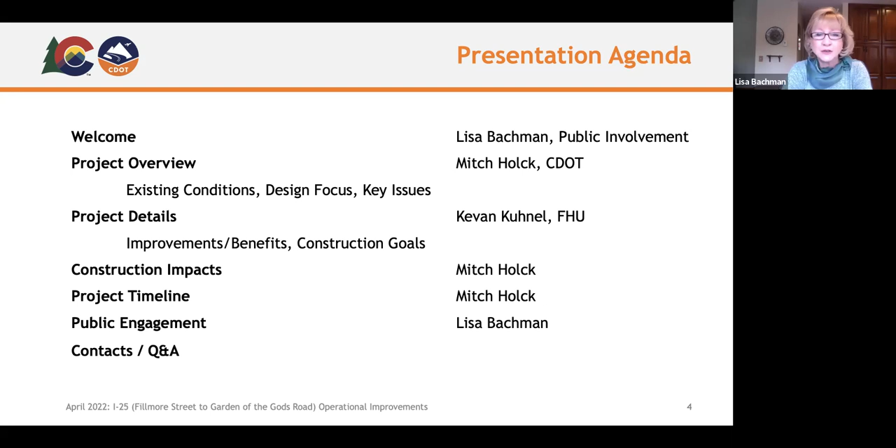And now I'd like to introduce Mitch Holck, who will provide an overview of the project. Thank you, Lisa. This project is on I-25 between the Fillmore Street and Garden of the Gods exits, 145 and 146. I-25 in this corridor is experiencing operational deficiencies, primarily due to increased traffic from community and business growth here in Colorado Springs.

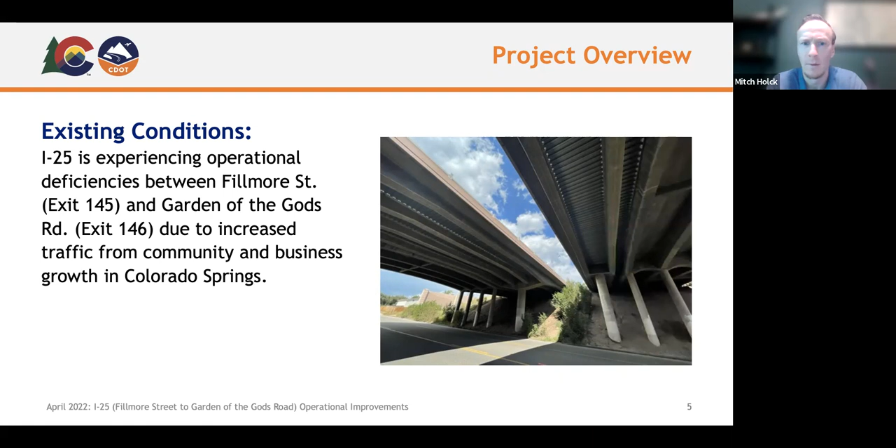The design team for this project has a primary focus in 4 areas: developing continuous auxiliary merge lanes between those exits, 145 and 146, replacing and expanding the existing Ellston Street overpass bridges, strategically preparing the corridor for long-term future expansion, and keeping our objectives aligned with the previously completed South Front Range Corridor Assessment Study.

We're estimating this project to cost about $52 million for design and construction, provided through state allocated infrastructure funds.

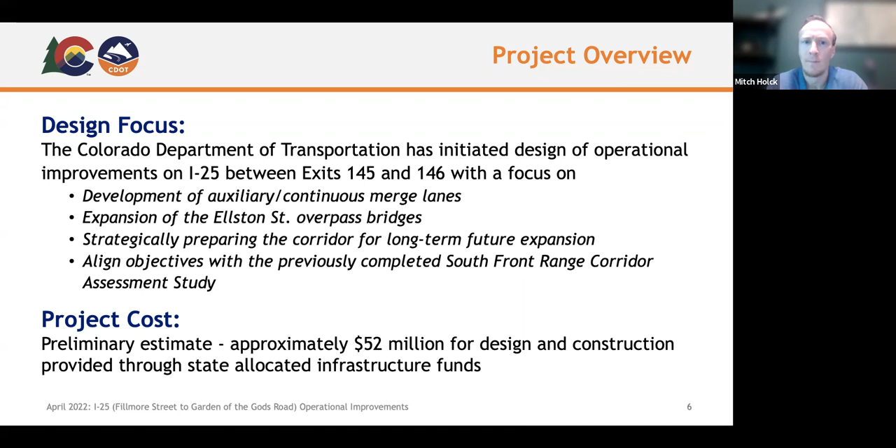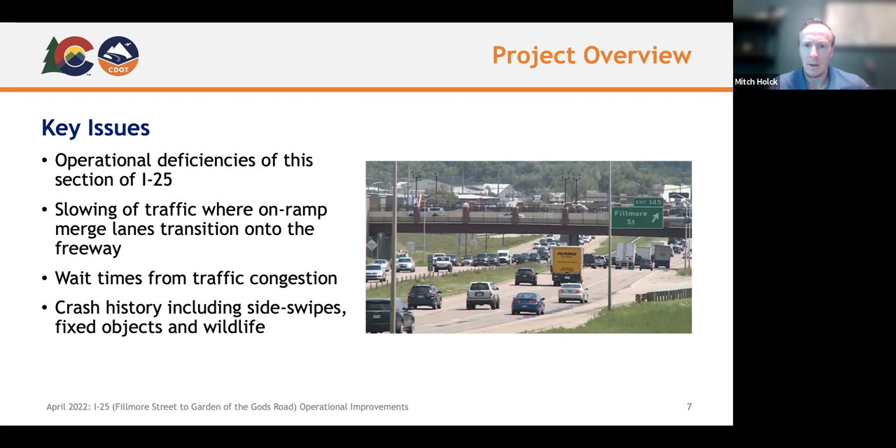Some key issues that we're seeing on the corridor in the project area include operational deficiencies, such as slowing of traffic where on-ramp merge lanes transition onto the freeway, wait times due to traffic congestion, and some crash history, including slight side swipes, fixed objects, and wildlife strikes.

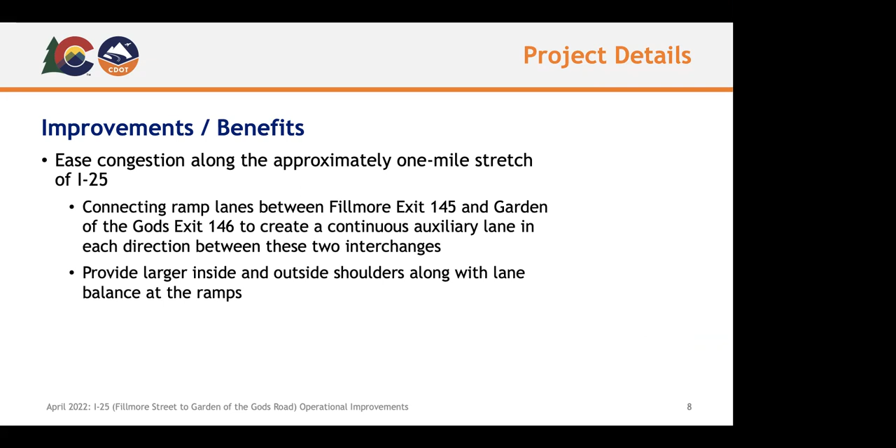Hello, thank you, Mitch. All right, I'm excited to talk about some of the improvements and benefits that we will be providing throughout the corridor. So as Mitch mentioned, easing congestion throughout the corridor is a main focus, and it'll be between Fillmore and Garden of the Gods. And the way we're going to do that is through operational improvements.

So one of the things that we'll be doing is a continuous aux lane between Fillmore and Garden of the Gods, and that'll give motorists a little bit of time to merge, whether onto I-25 or off of I-25, a little more time to make those movements.

Additionally, we will be providing larger inside and outside shoulders. That way, if there's a breakdown or if someone needs to pull over, it gives you a little more room to detour traffic around them.

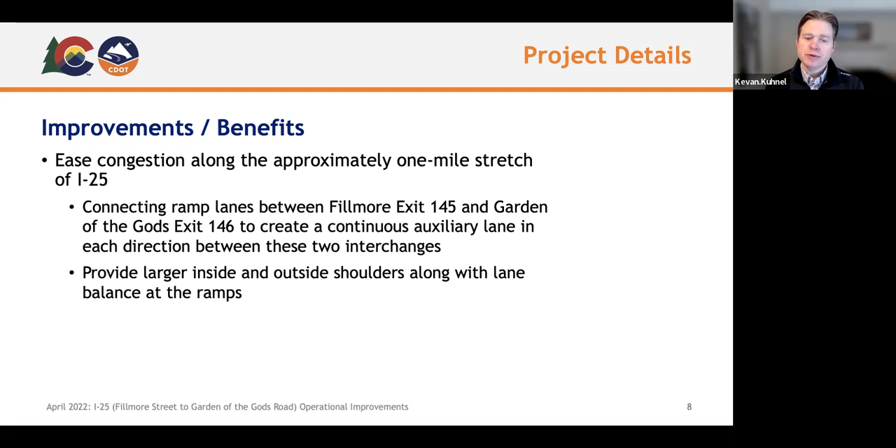And also lane balance. Currently at the off ramps, we've got a single lane off ramp. We'll be providing 2-lane off ramps. And what that does is it decreases traffic friction, makes it a little bit easier for motorists on I-25 to make that movement to exit the interstate.

Also, the Ellston Street Bridge is an old structure and it's a little bit narrow, so it can't accommodate all of the proposed improvements needed for this project. We'll be replacing those structures with wider structures, which will allow us to accommodate the aux lanes across them, as well as some future improvements planned for the project.

For the project area, if you've driven this corridor, you've noticed the pavement is a little bit rough and could use some help. So what we're looking at doing is resurfacing the project from a little bit south of Fillmore to a little bit north of Garden of the Gods. There's an asphalt to concrete joint in those areas, and basically from joint to joint, it's about 2 miles that we'll be fixing the asphalt to have a nice smooth, cleaned up surface when we're done.

Also, we'll be working on the ITS in the area, replacing the conduit as well as the fiber within it, getting that spliced over.

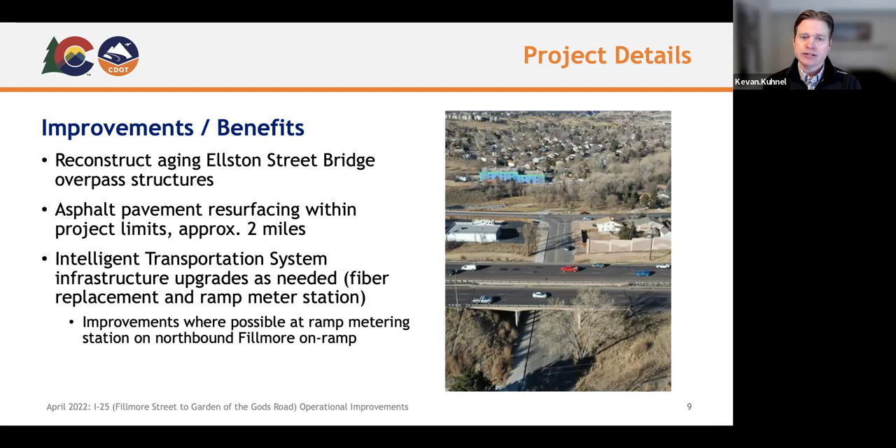Additionally, the northbound on-ramp at Fillmore is currently backing up traffic a little bit into Fillmore. What we'd like to do is add some additional storage to hopefully improve that a little bit.

Additionally, we have water quality enhancements planned for the project, specifically stormwater quality. There's a number of ponds throughout the corridor that are a little bit outdated, so we're going to bring them up to current standards and add new features like outlet structures, forebays, trickle channels, and improved access. They should then function a little bit better, have cleaner stormwater coming off the project, and also help our friends in maintenance have better access to get in and keep them in tip-top shape.

The Sinton Trail runs underneath I-25 along Ellston in the middle of the corridor, and we're going to make sure we preserve that with the project, as well as on the north side of Ellston. Currently there's a gap in the sidewalk, so we're going to connect the sidewalks, fill that gap in, and provide another pedestrian route through the corridor.

We've noticed as we've studied the corridor that there's been some incidents with wildlife. So in the Ellston area, we're going to add some additional fencing to help funnel the wildlife underneath Ellston, and provide a dedicated path on Ellston, just south of the Sinton Trail, to give them a spot to get through, keep them off the interstate, and hopefully minimize any wildlife we see up on I-25.

Also, as we improve those shoulders, we're going to be expanding them towards the center of the roadway where there's an existing cable rail barrier. We're going to take that out and add concrete barrier between the northbound and southbound lanes.

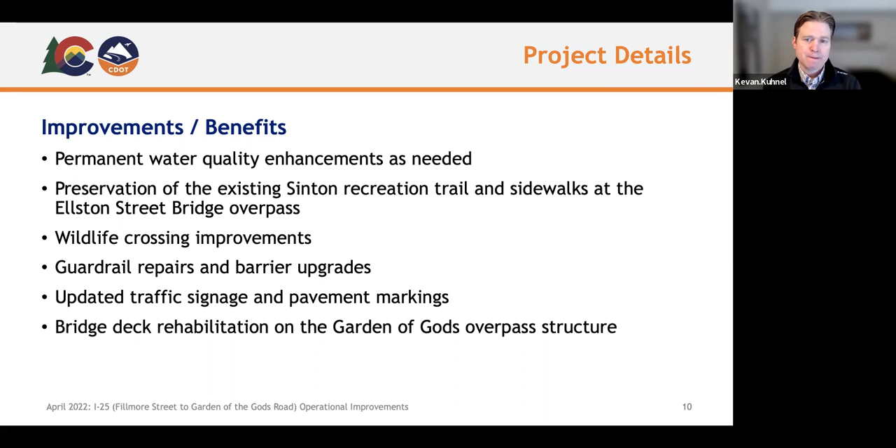Then construction goals for the project. This is kind of our guiding light through design, as it sets us up for what impacts the traveling public is going to see as a result of this project during construction.

And I'm happy to report today that our goal is to keep 3 through lanes in both the northbound and southbound direction during any peak hour traffic. We will need to occasionally do some lane closures, and we'll try to limit those to off-peak time as well as nighttime, to keep traffic flowing and minimize impacts to folks in the area.

Access is always important to our friends, the businesses and neighborhoods. We're going to make sure to maintain those as best as possible, have good detours, and focus on the Sinton Trail and Ellston Street, so that as we move into final design we keep access flowing for all those different elements.

We'll be using phased construction on this, doing a little bit at a time, to keep motorists and the traveling public moving through the project area, in small pieces at a time.

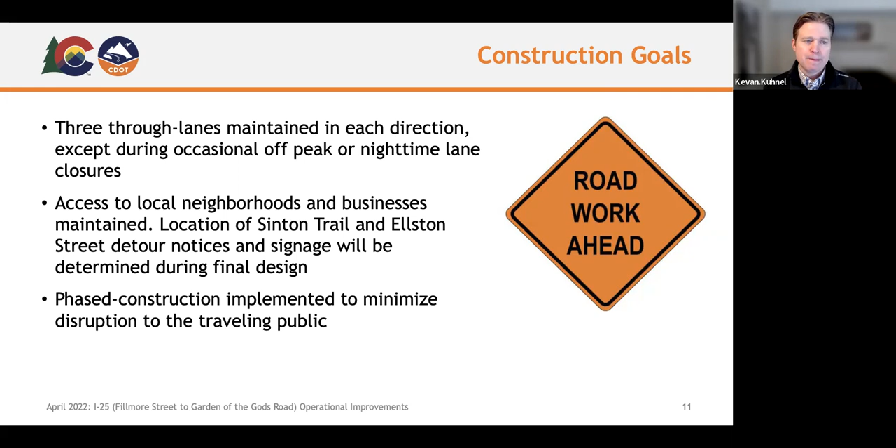Also, access to sidewalks and trails—we'll make sure to maintain those to the maximum extent feasible, along with bike and pedestrian detour routes. We've been working with a group of stakeholders to get input on how best to facilitate bikes and peds in the area, specifically at the Sinton Trail, dialing in those detour routes with robust outreach during construction so folks have advance notice if they need to take an alternative route or mode of transportation. The guiding principle is minimizing delays and keeping access moving through the corridor, especially for emergency service providers.

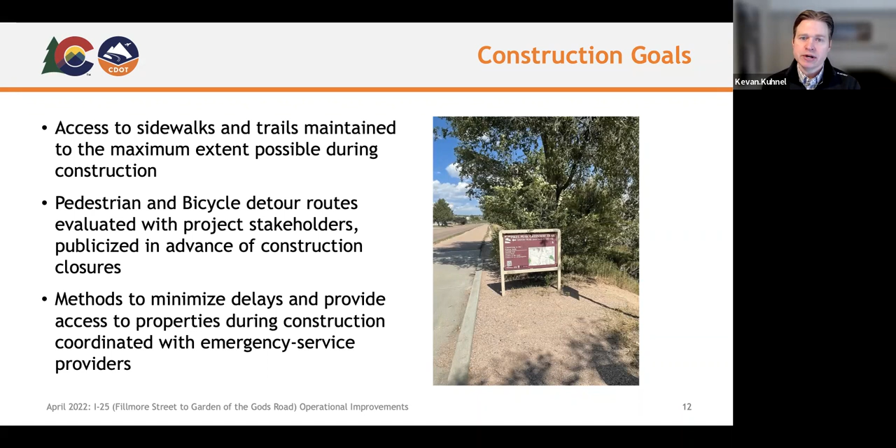With that, I'll hand it over to Mitch.

Thank you, Kevan. Moving into construction impacts for this project, we do anticipate some lane shifts and closures on I-25 during construction. Lane closures will predominantly occur during nighttime construction hours outside of peak traffic. Daytime lane shifts will be in place to route traffic around construction zones, keeping our workers safe and traffic moving. We expect ongoing reconfigurations of those lane shifts during construction.

We also expect some temporary impacts such as noise, air quality, traffic congestion, and access detours. These are typical for interstate construction projects, nothing out of the usual.

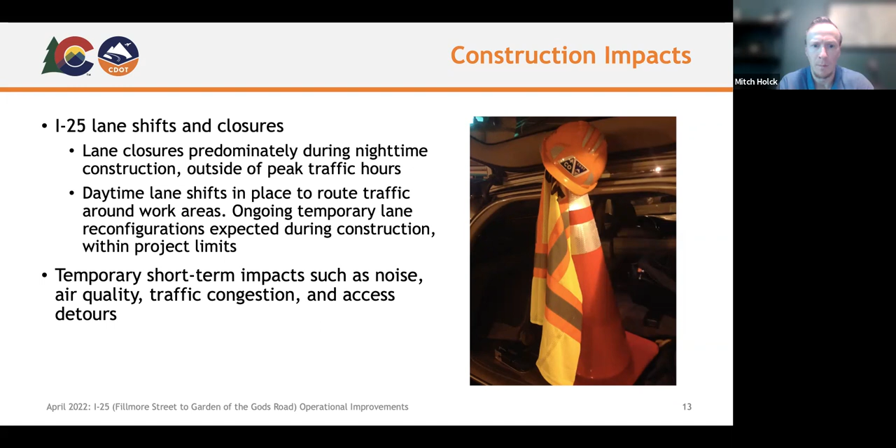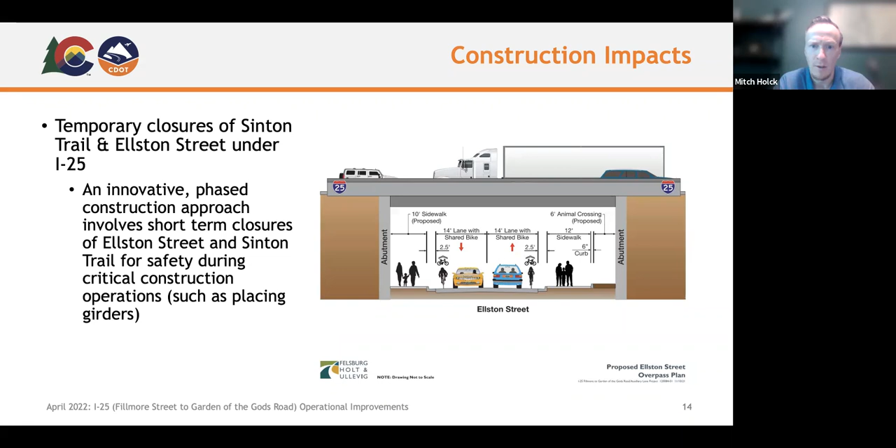Recognizing that Sinton Trail and Ellston Street are critical commuter paths for trail users and local traffic, our design teams developed an innovative phased construction approach that involves short-term closures of Ellston Street and Sinton Trail only during times when construction activities on the structures make it unsafe to pass underneath them. These activities might be something like placing girders.

Also recognizing that Sinton Trail and Ellston Street are highly used by our bicycling community, the design team has collaborated with local stakeholders to minimize impacts to trail users as much as possible, and also to establish safe and effective detours around the construction zone when Ellston Street and Sinton Trail are closed.

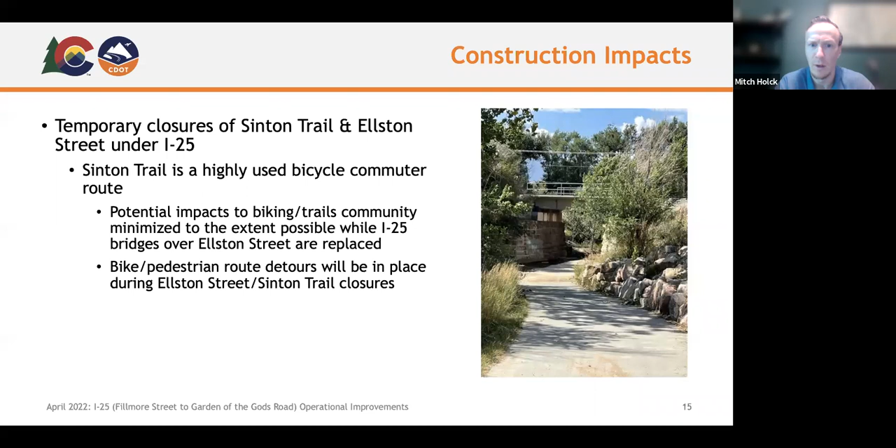Project timeline: we've completed technical analysis and preliminary design for the project and have moved into final design. We expect that to be done by the end of this summer, with construction starting as early as this fall. We expect this project to take approximately 18 months, with about 15 months of bridge reconstruction over Ellston Street. We anticipate this project to be done in 2024.

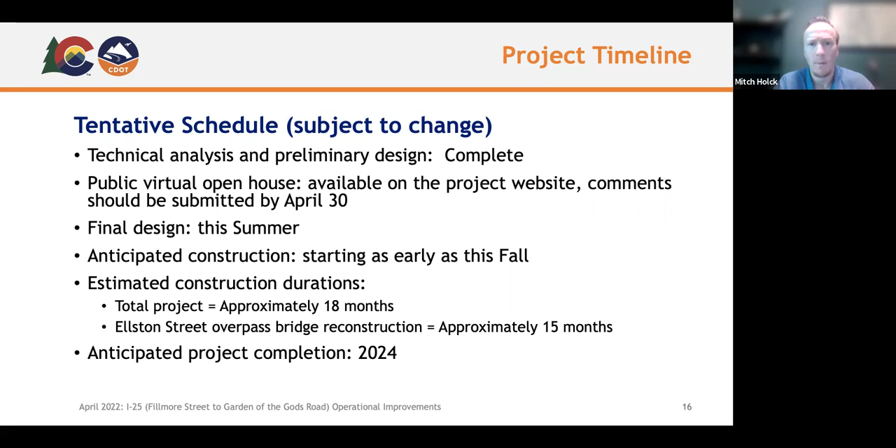Next up is Lisa. She's going to talk us through the public engagement strategy.

Thank you, Mitch. As Kevan indicated, over the past several months we have been reaching out to the public to discuss the project and get feedback. There are numerous stakeholders along the corridor, including adjacent neighborhoods, businesses and residents in the vicinity, School District 11 and their transportation folks, the traveling public, the biking and trails community, Mountain Metro Transit, our local bus service, City of Colorado Springs staff including the Parks, Recreation, and Cultural Services Department, and of course the Colorado Department of Transportation and Federal Highway Administration.

Throughout our outreach efforts, the public has expressed a positive outlook about this project and indicated they would like to see it get done as quickly as possible.

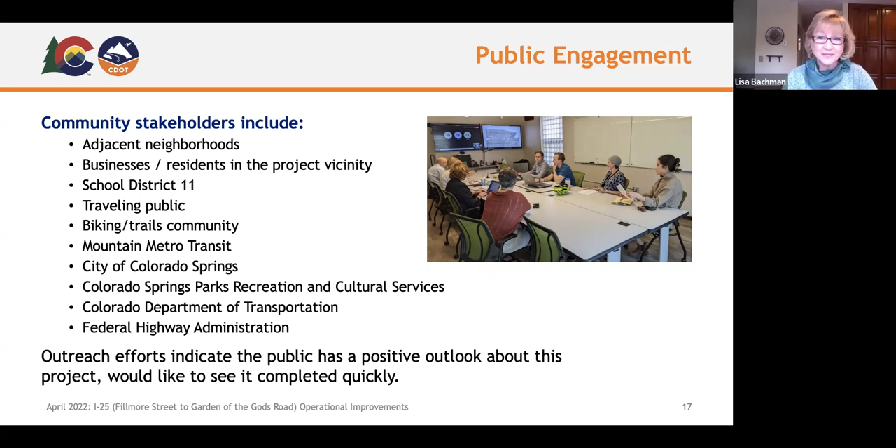We will continue throughout construction engaging property owners and stakeholders through a variety of communication methods. We'll use direct contact, small group meetings and briefings, send email notices and project updates, and post information to the CDOT website on an ongoing basis. We'll also work with local news media and post on social media.